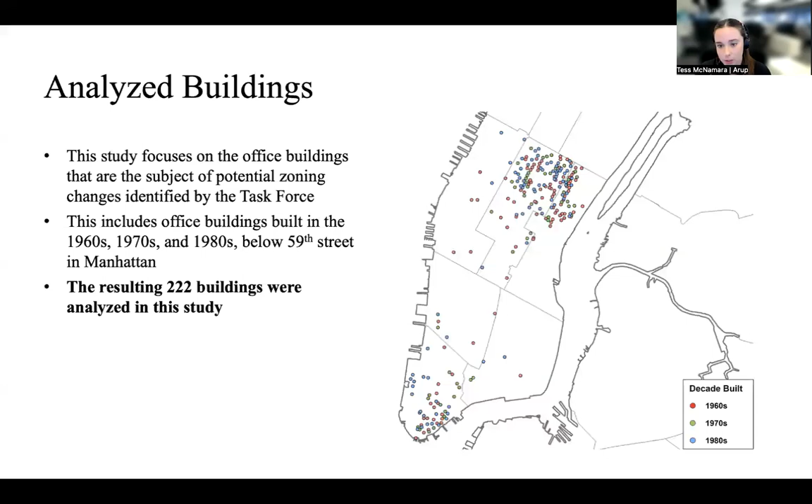Next slide. And so this is what that looks like. This map is showing the office buildings that are over 10,000 square feet, built in the 60s, 70s, and 80s that are currently not eligible or have limited eligibility for conversion. So this comes to 222 total buildings that we used in our analysis. We analyzed the operational and embodied carbon savings from converting these office buildings to understand the scale of savings that could result from the change in zoning. It's important to note that we're showing carbon saving values for the window of opportunity that this zoning could create based on the total square footage of the building set in question.

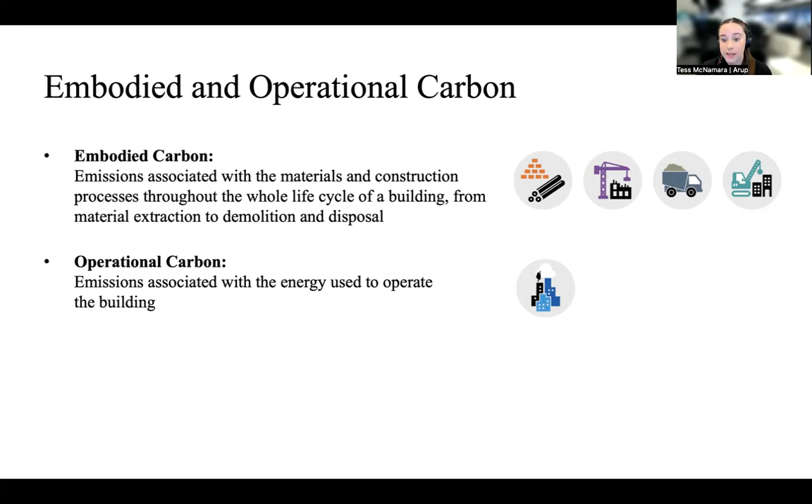So we're looking at both embodied and operational carbon savings, and that means we're taking a whole life carbon perspective. So I'll go into some of these definitions. By embodied carbon, I mean the emissions associated with the materials and construction processes throughout the whole life cycle of a building. That includes material extraction, transportation, construction, the use of the materials, and then eventually demolition and disposal of the materials. Operational carbon is more straightforward. That's just the emissions associated with the energy used to operate the building, so essentially the carbon impact of your monthly energy bill. To get a whole life carbon approach, we looked at the embodied and operational emissions together out to 2050 to understand the entire footprint of the built asset. Go to the next slide.

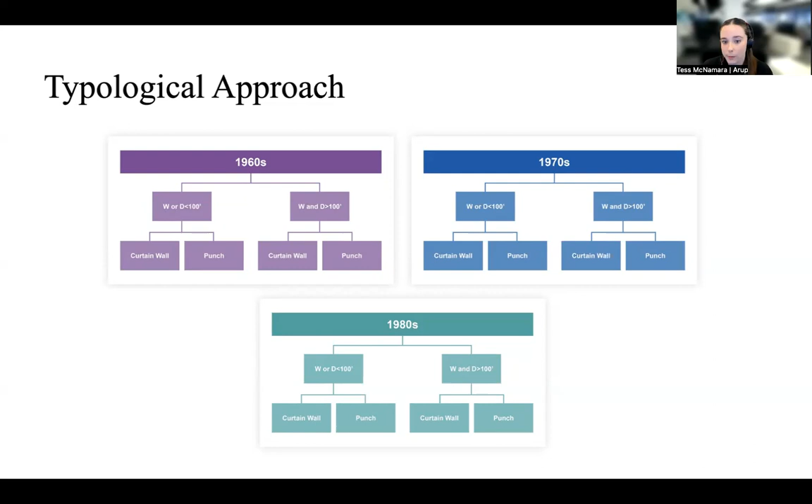And so that demolition and then replacement of that area on top of the building will have an embodied carbon implication because it's including material we're disposing of and then new material being brought in as new construction on top.

So replacing a full curtain wall, the full facade of the building, like reskinning it, will improve your energy performance. You're making it a tighter envelope, which we'll talk about, but it also requires more upfront embodied carbon because of the amount of new material going into the project.

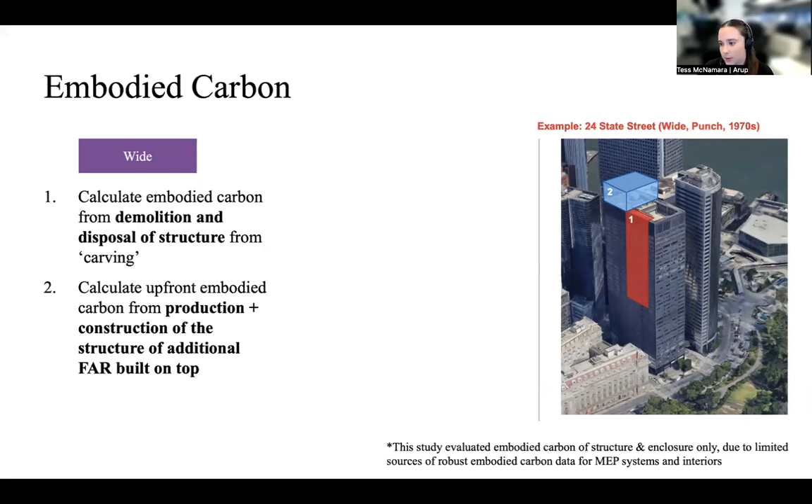Next slide. And then all buildings are either punch windows or curtain wall windows. So we calculated the embodied carbon from the demolition and disposal of windows or the entire curtain wall in both cases, because we're replacing out the windows. And then the upfront emissions from production and construction of the new windows or the new curtain wall.

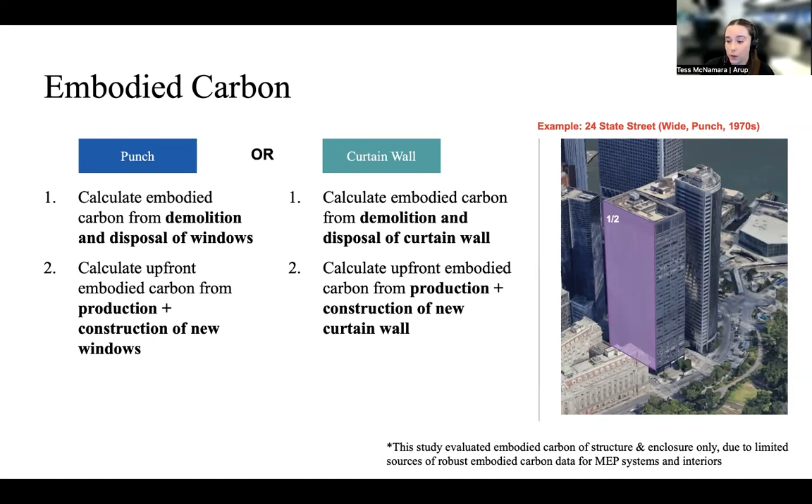Next slide. For the operational carbon piece, the first step was that the energy use of the existing office buildings, which we had all of that data from the city for all 222, was first scaled to residential use. And then we accounted for a series of energy conservation measures that would result from the retrofit, so things you would do during the conversion. And again, the distinction of window type was the most important here.

So for all buildings, we applied a lighting reduction, HVAC and domestic hot water electrification. So we assumed that we were electrifying all of the buildings, and then you get an energy savings from the window replacement. But for curtain wall buildings, we were also able to account for increased wall insulation and reduced air infiltration because we're putting in a brand new facade. So curtain wall buildings are able to claim higher energy reductions in our study because we're saying the full facade will be replaced. Next slide.

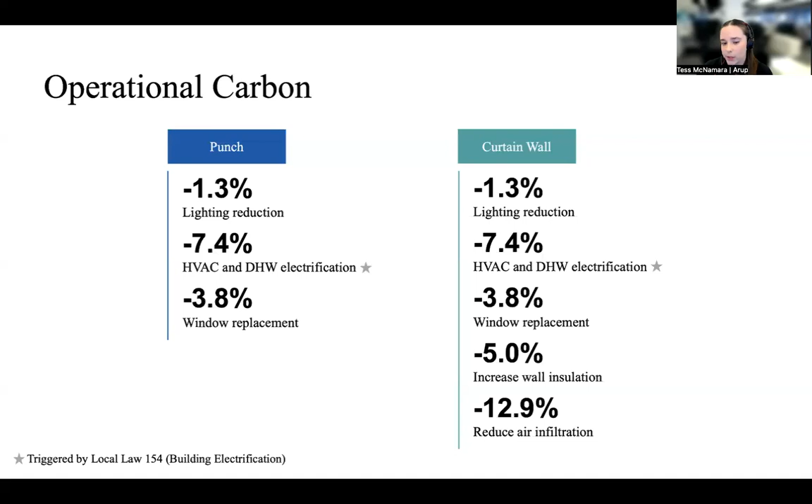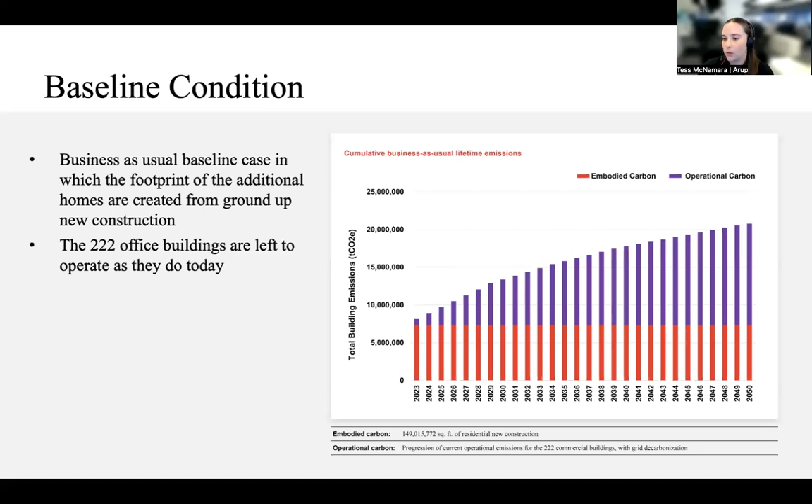For operational carbon, the baseline condition is if the 222 office buildings are just left to operate as they do today. So this is in purple. And the cumulative emissions grow each year because your building is constantly using energy and therefore emitting carbon. So it adds up over time. Next slide. So that was the baseline condition.

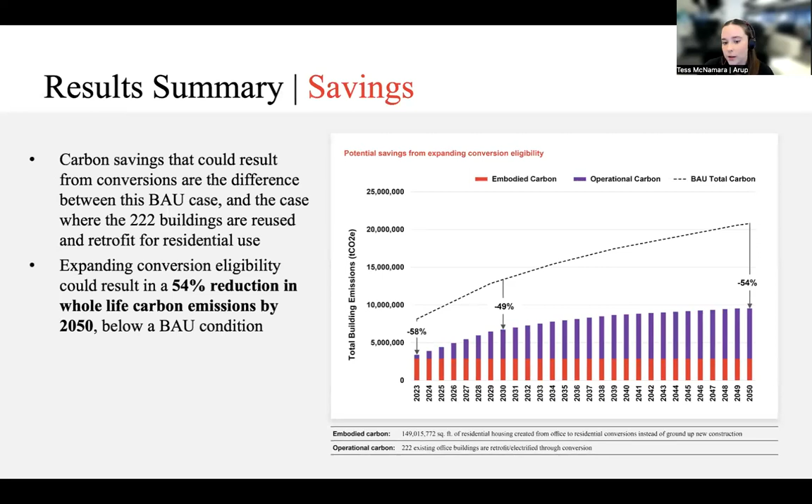It's important to note that this model is as if we flipped a switch and all of the conversions happened in 2023 for all of the buildings in the data set. So we looked at the most expansive version of the conversion scenario to show potential savings if this window of opportunity were fully seized. So the potential savings come to a 49% reduction in 2030 and then a 54% reduction below the base case in 2050.

Next slide. So I'm just going to go through a few interesting corollaries that came out of this research, the first of which is the impact on Local Law 97 compliance. So the graph on the left is business as usual office building emissions relative to Local Law 97 thresholds. And the graph on the right represents the converted residential building emissions. So starting on the left, the blue dashed line at the top is the 2024 emissions limit for office buildings under the law. And the green is that reduced limit in 2030 as the law gets more stringent.

So you'll notice that by 2030, 10 out of our 12 existing office typologies have emissions over the limit in green. So this just underscores the buildings in our data set are poor performers. They're exactly the type of outdated buildings that the law is trying to target, and they're mostly going to face fines in 2030. In our converted graph on the right, though, you'll see that all of the buildings comply with the 2030 residential limits because of that electrification and the retrofits that we accounted for during the conversion.

So this was just an interesting note, sort of further proves that expanding flexibility and support for the conversions could facilitate compliance with Local Law 97 because developers would have additional financial impetus to actually take on the retrofits and recoup some of the costs.

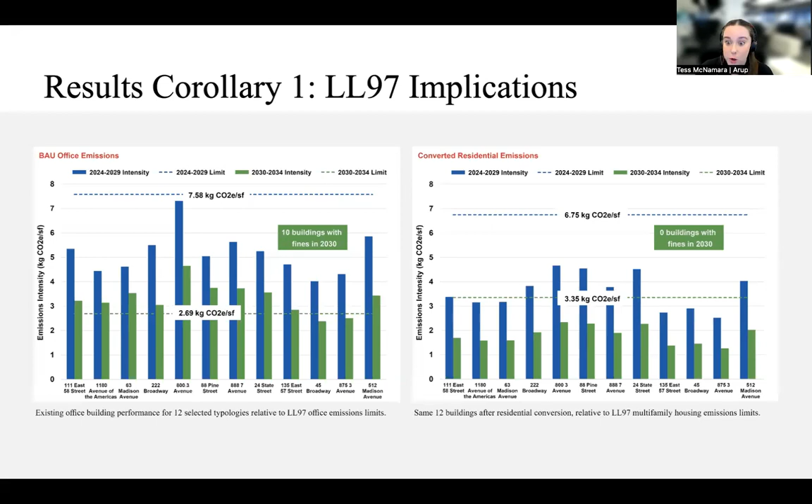Next slide. So the second interesting corollary is the carbon payback from replacing a full curtain wall. So critics of Local Law 97 have pointed out that it doesn't consider the embodied carbon cost of things like a full facade replacement that the law is trying to incentivize, looking just at operational carbon savings. And we realized that we have the data to answer whether this facade replacement actually makes sense from a whole life carbon perspective. So this graph is looking at the scenario in which a full curtain wall is replaced in 2023. So that's that jump in red embodied carbon.

So there is a significant embodied carbon spend, you could say, from a full curtain wall replacement. All the new steel, the glass, the material going in. The black dash line is the baseline scenario. So that's just saying the operational emissions if the building continues to operate today with no changes, no retrofits. And so what we see from the whole life carbon perspective is that the upfront embodied carbon cost of the full facade replacement pays back in 10 years.

So starting in 2033, we actually see savings below the baseline case because with the full facade replacement, we've made our building more efficient and it's paid back that upfront spend. And the end result is that by 2050, the full facade replacement would reduce the total carbon emissions of the building by 18%. So this sort of answers that facade replacement can really make sense from a whole life carbon lens that we looked at, a 70s building that was a poor performer. And so that would make sense.